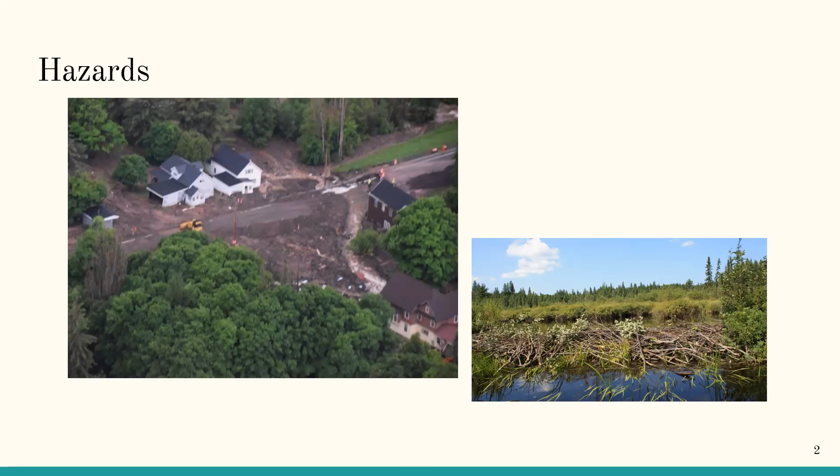So when looking at this creek here, we looked at the stormwater management systems around the area and saw that there was a need for a better system. So we looked at the major issues of this, looking directly at the town of Ripley. Like Troy said, the creek goes under the houses there, and sediment can go into houses and yards, and major erosion could occur.

And after speaking with the Franklin Township Supervisor, we learned that there were beaver dams that were blocking the tributaries up near the top of Ripley. And then we looked at the road directly below the creek and decided that this was the biggest issue that we wanted to focus on due to, like Troy said, the lack of transportation that could go through this area.

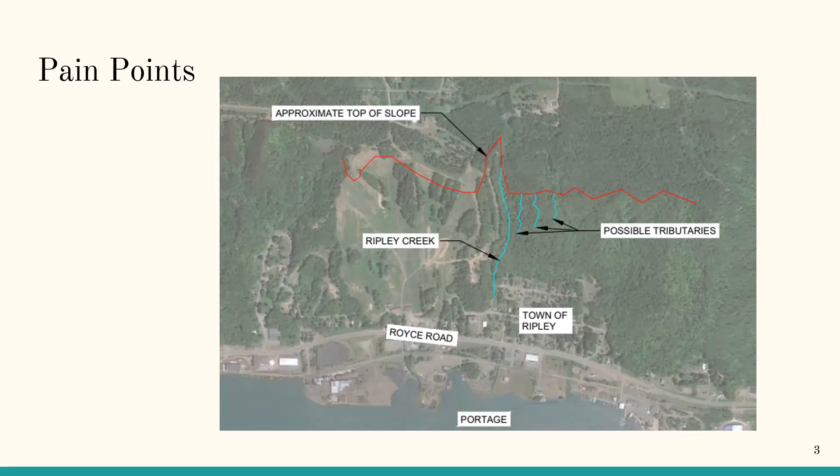So people who are affected: local residents and population, businesses and tourism are all affected. So the houses directly next to that could be washed out or eroded. And like Troy said before, the fire station is right below there. So lack of access from the fire station and erosion at the fire station directly could be affected.

And then if this major road were to be washed out, emergency services would not be able to gain access to a large amount of the population over there, and evacuation routes would also be affected. And tourism would also be affected by this road as well, if they were in the area or trying to pass through the area at all.

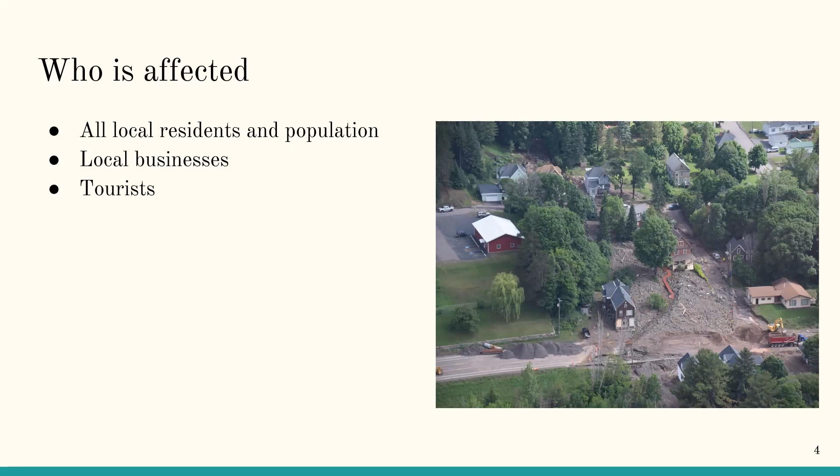So our first design solution that we came up with was implementing a detention basin just north of the fire station that currently lies there. This essentially would divert the water away from Ripley Creek in the event of a major storm. This would help that culvert essentially ease the amount of water that goes through there, so it would alleviate some of that pain.

Part of this detention basin would have a riser, so when it fills up with water, it actually runs through a pipe and would be directed towards the portage. Some of the problems that would arise with this detention basin are just basic inlet and outlet clogging problems from sediment and buildup.

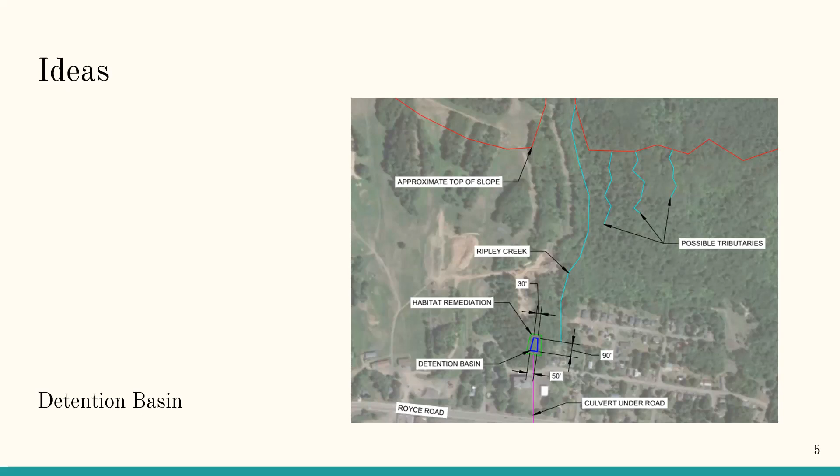Our next idea happened to be a retention pond, which unlike a detention basin always has water standing within it. So the idea was to direct some of the tributaries into the retention pond, so that it would alleviate some of the pressure that's on Ripley Creek, so it wouldn't have as much water flowing through at once.

Part of the problem here with the retention pond is there's not a ton of space around the village of Ripley to actually place something like this. So we had to put it on the northern slope above the village, which could be a problem.

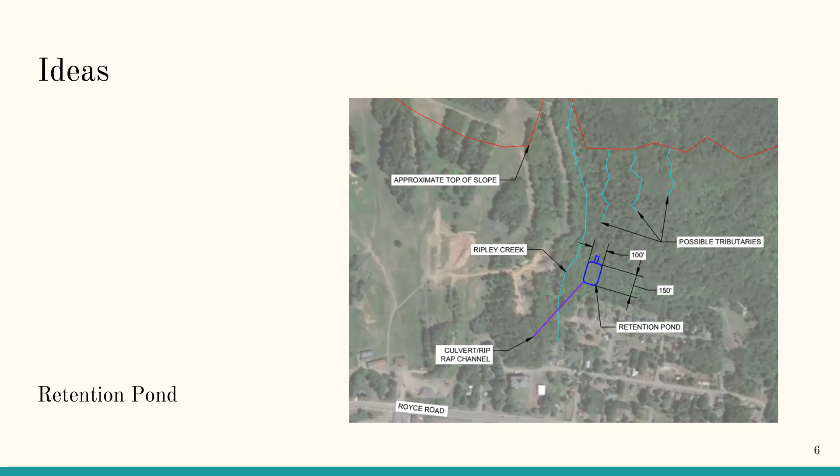Like Kate and Troy mentioned earlier, we spoke to the Franklin Township supervisor, and she mentioned problems with beaver dams and clogging of tributaries, so water couldn't flow right all the way to Ripley Creek. So one of our solutions happened to be clearing tributaries. There just isn't a lot of survey data or data available to really pursue this option, as it's not really known where these tributaries are and whatnot.

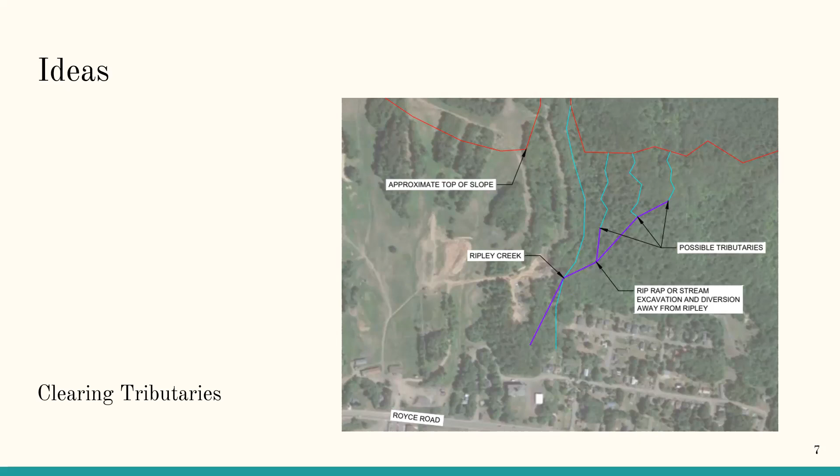So our final idea and solution happens to be a small concrete dam that we would place there in Ripley Creek. This would have a small orifice at the bottom to allow for a regular level flow and to only take in during high storm events.

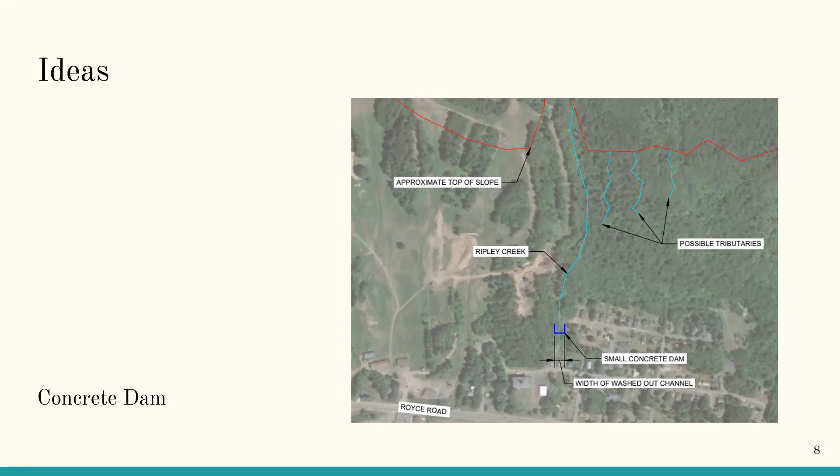This dam comes with minor problems. If you were actually to implement it, it would really only affect the habitat around the area. That's about it.

So here's our FMEA comparison of before and after we would implement these design solutions. Basin overflows, detention pond overflows. The retention pond overflow, excuse me, would probably be the biggest hazard, of which a solution to that problem might be driving more piles, getting it more sturdy and able to handle the amount of water that would be there.

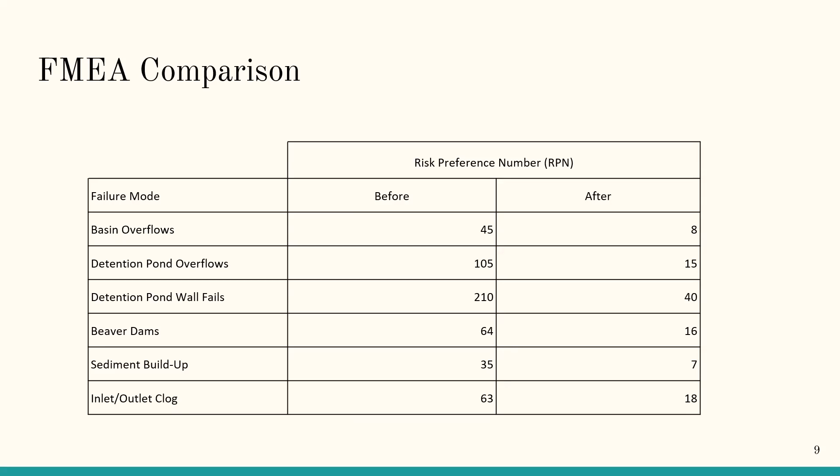So we came up with a rough cost estimate for each of the ideas to help us decide which was gonna be the best. So obviously the dam was currently the biggest cost just due to the work that would go into that. But we definitely weighed our options here, but it was a risk versus reward. And that's what really led us to actually continue on with the dam over the other projects.

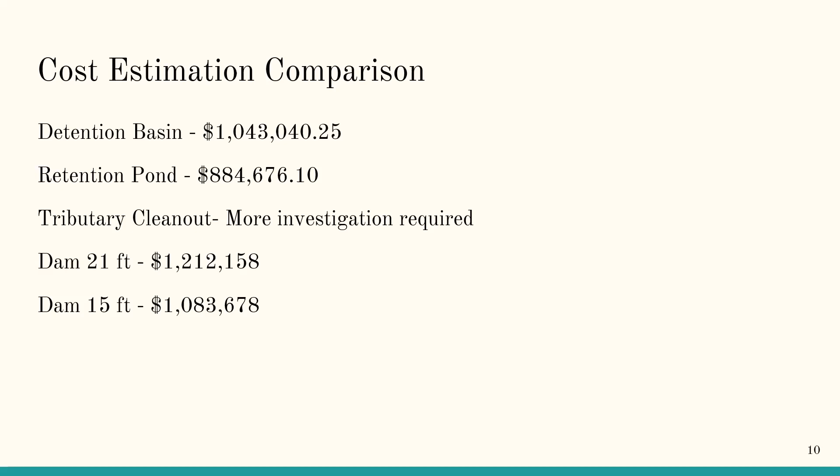So after we went through the brainstorming process, we decided to start the actual design process, and we started with ask. We asked our stakeholders their input and feedback on each of our designs and solutions, and what they would think the best option would be. So initially, we were going to do the detention basin or retention pond, but after looking at the failure analysis, actually implementing either of those into a side of the hill would have been a lot more difficult and had a lot more issues with it.

So we decided to proceed with the dam design, and then we moved into our researching and imagine phase. We went out to the actual area where there's a natural valley where the creek goes through, and we looked at where we could put the dam and stuff like that. And then we surveyed the area ourselves to get a more accurate reading of that area. And then we moved forward with our planning and creation. We did flow calculations in GIS software, and then created our actual design in AutoCAD Civil 3D.

And then moving forward with our testing and improving, we couldn't really test our solution as of now, but looking at past reports and seeing that this is still definitely an issue in that area, we think that implementing this would be a good solution.

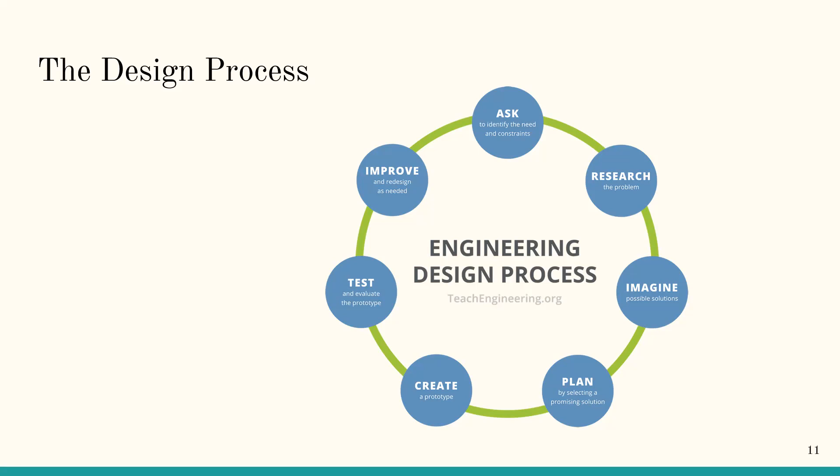So we were actually able to get our hands on a total station and prism poles from the surveying department. We weren't as focused on actually finding a corner and surveying all the way into the valley right here. But instead we were able to go find the highest points and the lowest points within the valley to give us an idea of what kind of volume we would have. So we decided to take a topographical survey so we could have an idea of the amount of water that would be held in this area should we construct the dam.

And then we were able to make a surface in AutoCAD Civil 3D reflecting our differences in elevations through here. So we were able to have a width of the valley and then the length and then where would be the best fit for the dam.

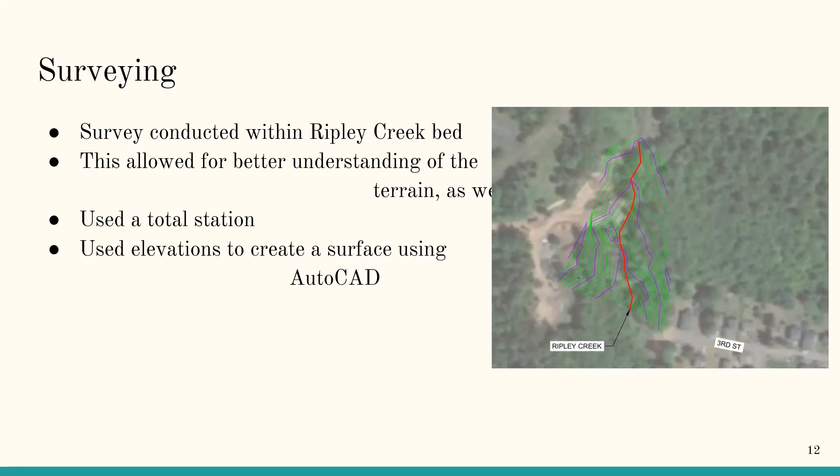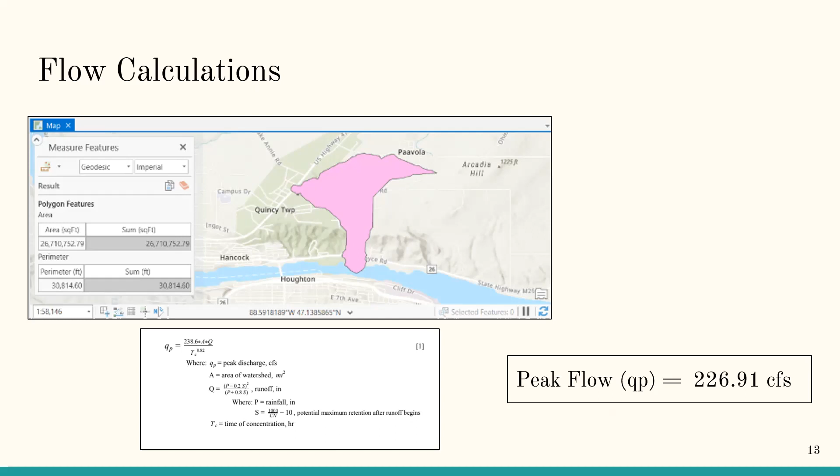So, now that we have our survey done, we could create this surface in AutoCAD. Got to see that we had about a 30-foot vertical height difference to work with within this washed out creek bed.

So to better understand what the surface is actually doing, we created an alignment that runs from north to the south, reading here on the profile left to right. So you can see we lose a lot of that elevation the closer to the portage we get. And again, you see that 30-foot difference.

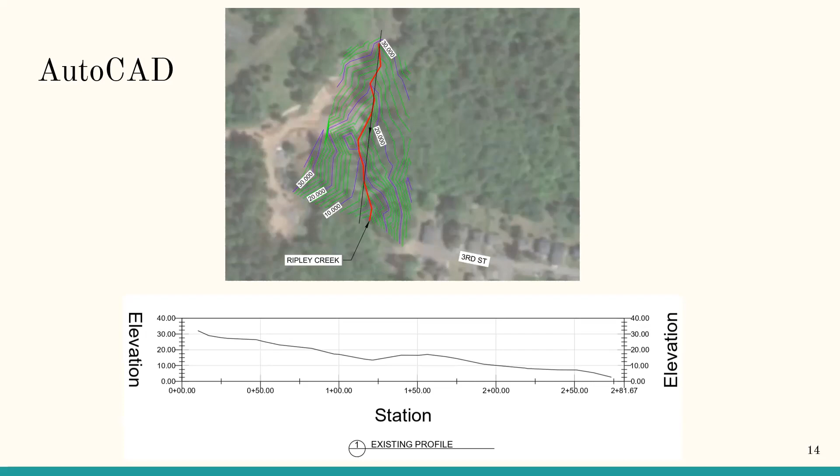The one main constraint that we have with the area to build with over here is the area of the surface right by 3rd Street, which is the main access point to our area over here. That elevation difference from the lowest point is only about 24 feet. So obviously we don't want to construct the dam higher than that and risk washing out the road if that dam does fill and overflow. So go to the next slide.

So with that in mind, we can design our dam to only be 21 feet high so that if that does overflow, we've got about 3 feet of clearance so that the road hopefully won't be affected. We placed the dam at our lowest, farthest south surveyed area so that we have the biggest area to work with in terms of water storage. So to fit that widest downstream cross section, the dam's going to be about 120 feet wide, which gives us a 200-foot run of storage space back up to the highest point north.

We incorporated a rectangular orifice into the center of the dam that is going to run over where the creek naturally flows. So during normal conditions, that creek still is able to flow naturally. And the dam really only kicks in during flood events to retain that water and hopefully decrease some of the erosion that would happen downstream.

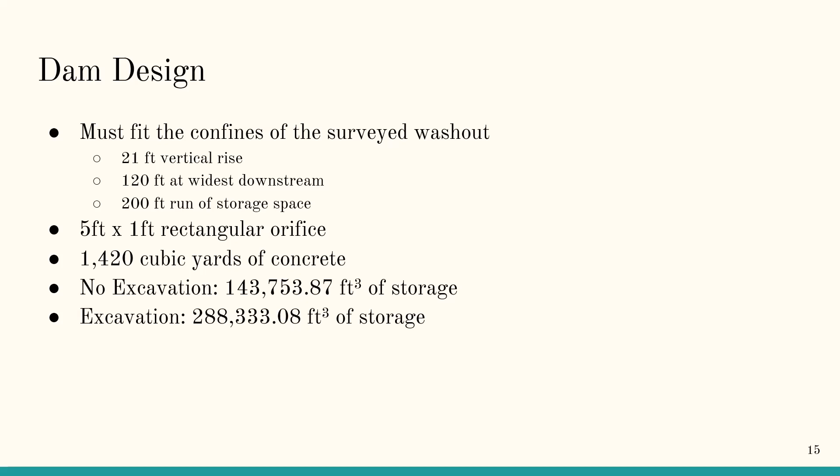To construct this dam with the dimensions that we have, it would take about 1,400 cubic yards of concrete. And then we also toyed with the idea of excavating behind the dam to increase the total amount of water storage that we would be able to have. And the excavation, which will be in the next slide, pretty much doubles our total volume of water storage that would be possible.

Without excavation, that dam would fill up in, we estimated, about 2.5 hours. And with the excavation, just over 5 hours it would take to fill, which greatly increases our time to evacuate anyone from the area and avoid any washed out roads. So even though the excavation does increase the costs for this project, we felt that with double the amount of time to save anyone from the area if necessary, giving more emergency access, that was a cost that we were willing to incur.

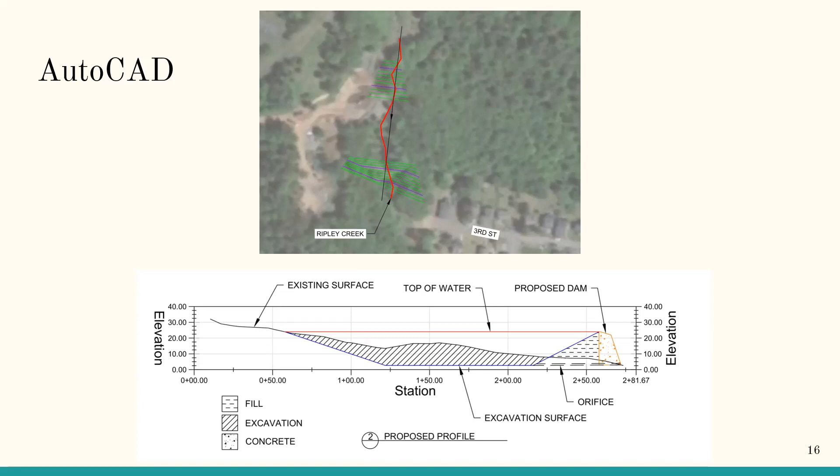So, like I said, we felt that this was the best project, the best way to implement this because, again, it keeps the natural flow of the stream during normal hours, doesn't really affect much, but handles the storm concentrations, which is what we were really looking at as the hazard for this area. It solves that pain point while making very little impact on the day-to-day use of the area.

And the other designs would require a lot more excavation into the hill of the area. And the dam uses that natural slope that already exists to the advantage of that area, which is another reason why we think that this is probably one of the better ideas for the washed out creek.

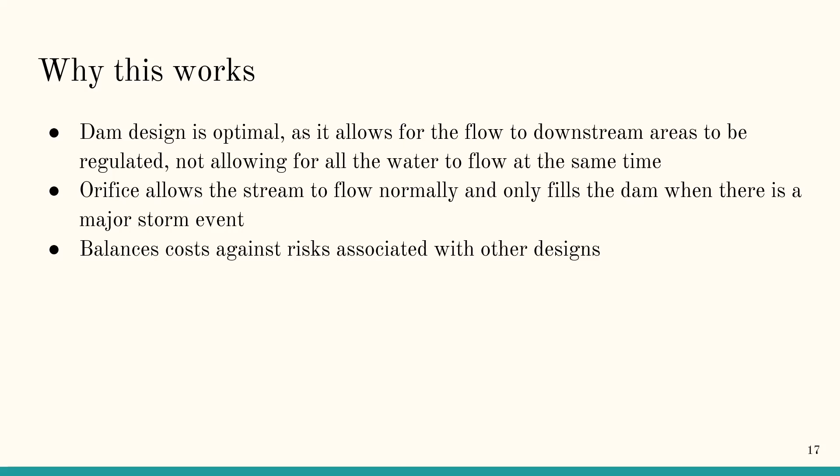So for our cost estimate, we determined it was going to be about $1.2 million to construct this dam with excavation, excavation actually being the largest chunk of cost. But we determined that was worthwhile for, like Adam said, how much time that road would probably still be able to stay open, and how much time we would have for the storm to either end or get people out. And then we went into all sorts of other stuff, because we figured that we're going to have to do a little bit of land clearing.

And something we haven't really touched on much is, to prevent clogging on that orifice, we looked at putting a steel grate to prevent any large objects from coming in. And it would also make clearing out a clog easier; instead of having it be in the center of the dam, it could be on the outside of the dam to wipe it away. And then just some other small costs, but the biggest cost and benefit was going to be doing all of the excavation for the project.

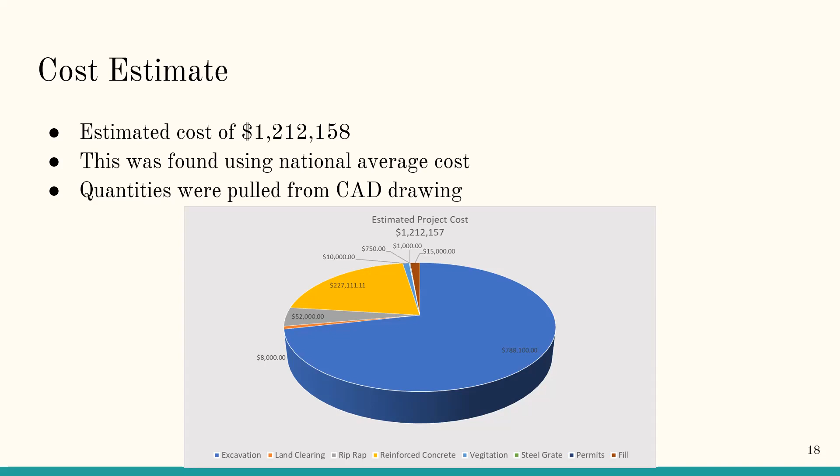So was that peak flow you calculated the expected flow in a storm or the peak flow that the dam can handle? That was expected in a storm, so we looked at the 100-year, 24-hour storm, because when we were doing research on dams, that was the standard design storm for a dam. Yeah, that had to stay the same over the future.

The 100-year storm. Yeah. With the frequency that we've had large storms around here, having a 1,000-year, a 500-year, and then I believe there's another 500-year storm not a year or so after, or something like that. Between now and then, there was another big storm. I would expect that the 100-year storm is actually probably going to go up, looking at the frequency of the storms we've been getting. So if this were to be implemented, that would definitely have to be taken into account of future peak flow events.

You design any kind of overflow? Not currently, no. We designed the rectangular orifice at the bottom that would allow for flow through, but not at the top doing an overflow. You need something like that? Yes. Yeah, we looked, and there was a lot of different approaches we saw, but none of us were super familiar with the dam process.